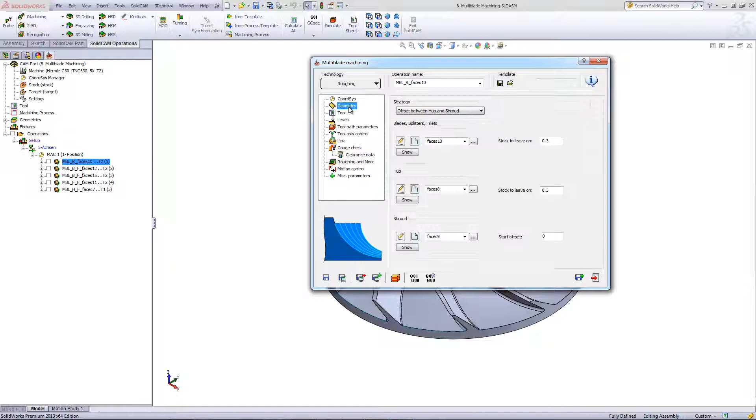When you go into geometry, you can see by touching each area exactly what you need to choose. For example, the first is asking for the blades, splitters, and fillets. And in this particular case, I chose exactly that, my blades and the fillets, including over here. If I were to go into my hub, you can see I have my hub, which is this area over here, the floor over there. And it also requires me just to choose the shroud, the shroud being the actual top of the blade as shown over here.

The option that we have on top is the strategy of offset between hub and shroud. Among others, we also have offset from hub or offset from shroud. Most often used, however, is the offset between hub and shroud. Now, let's go into our tool. In this particular case, I'll be using a tapered mill tool. The reason for using a tapered mill tool is because it's a very sturdy tool. It's used very often in parts like this, where you can have a small diameter at the bottom, but still have a strong tool up towards the top. So this is a much stronger tool to use, and we do support using tools of this type.

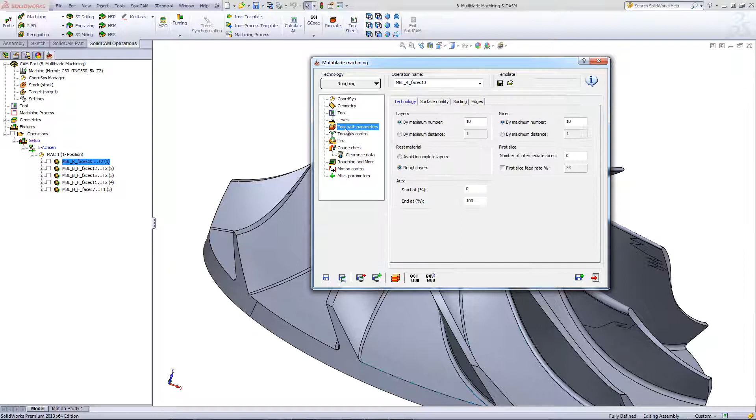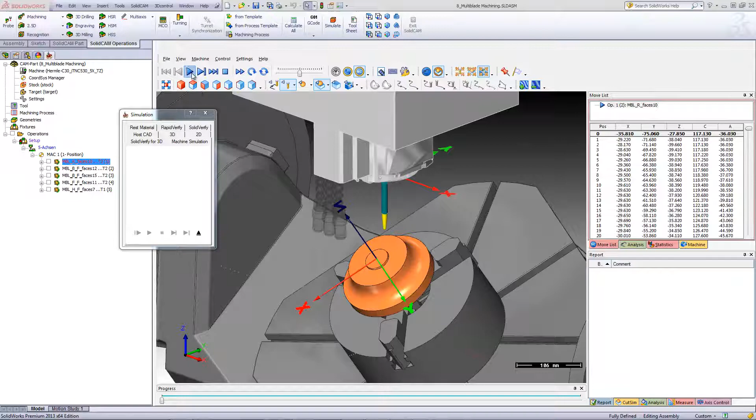Now let's go immediately to our toolpath parameters. All we have to do over here is determine the maximum number of layers as shown over here and the slices as shown over here. I do not have to do anything in the tool axis control or my links or even gouge check. Now let's take a look at the machine simulation, and you'll see that the tool is actually working exactly in that area itself. As I zoom in to the blade itself, you can see exactly how it's working.

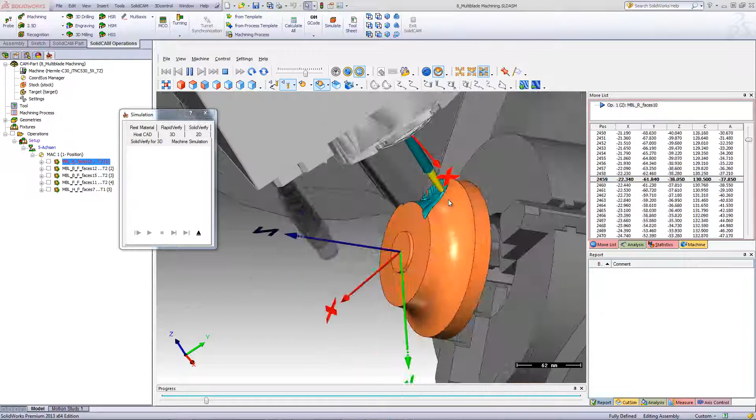And let's just go a little faster. And you can see that it's actually working exactly the way I want it, roughing it out from the top and then going down to its next step until it completely finishes the part itself. Let's stop it over here so we can see what was done up until this point. And as you can see, it's actually working around this entire area.

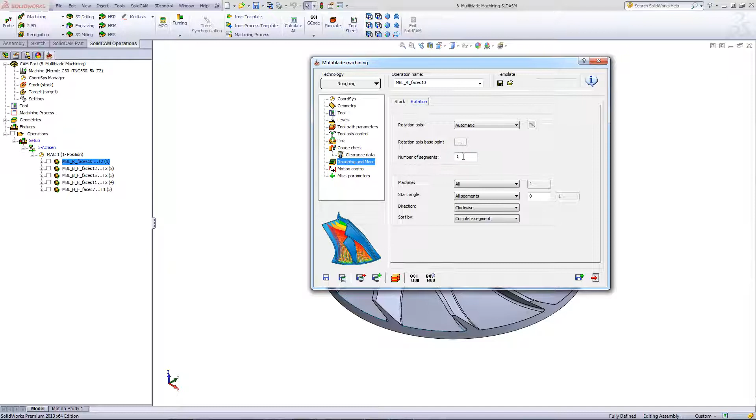Now, if I want to do this on the entire part, all I have to do is go into roughing and more and go directly to rotation. And rotation is all very simple. It's just pick the number of segments. In this particular case, I want to have all 5 segments. There are 5 segments on the part itself.

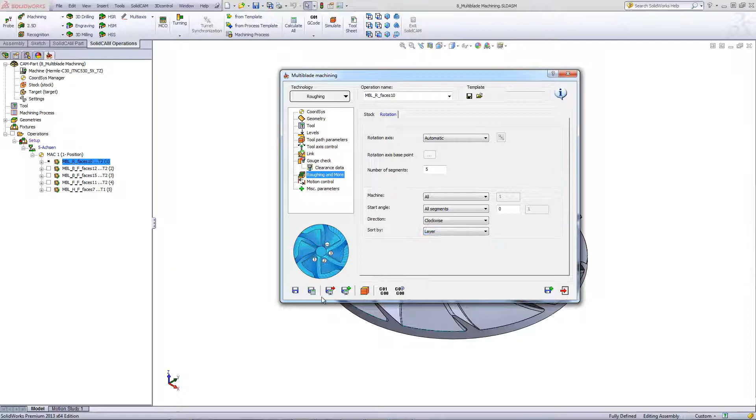And I can either machine it by determining the number of segments I want to do or do all of the segments. I can also do each segment individually or do it by layers across the part or by slices along the part itself. You can see also on the side the diagrams that are chosen every single time I change the sort option. And by the way, the diagrams also change in every single one of our fields over here. Let's change the sort by to layers, for example, then calculate and run my simulation.

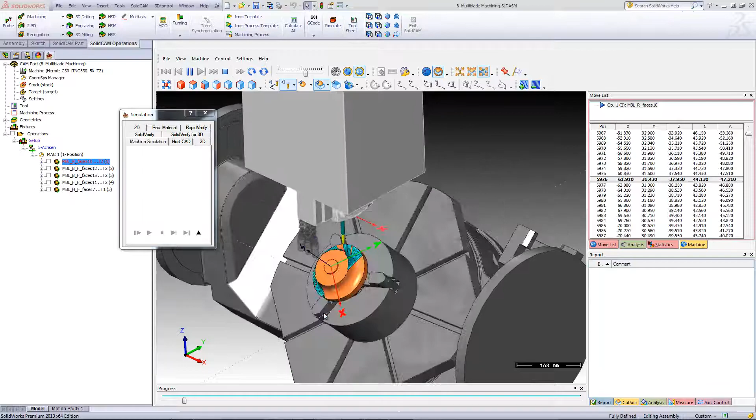You'll see that the tool will go down, work at the first level as shown over here, and then when it finishes that, before going further down into the part, it'll actually now turn and do the next segment, finishing each layer over there. Once it finishes that particular segment, then it'll go to the next one and to the next one. When it goes back to the first one, then it'll go to the next step, as I've determined that's the way I want to work on this particular part.

Let's stop the simulation for a moment, and you can actually see that each segment is being machined out around the part itself. Now, in our next operation, we've used the same option of multi-blade machining, but this time we'll be doing blade finishing, working on the blades itself, as shown over here in the diagram.

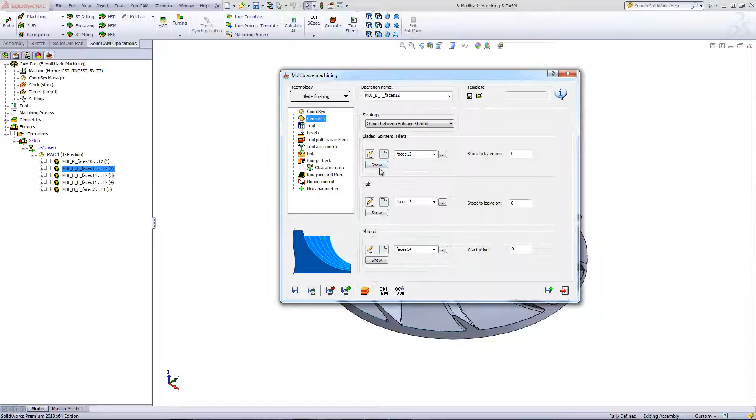The geometry, just as before, we have our blade splitters and fillets, as shown over here, working on this particular blade over there, our hub, and of course we have our shroud, which is the top surface over there.

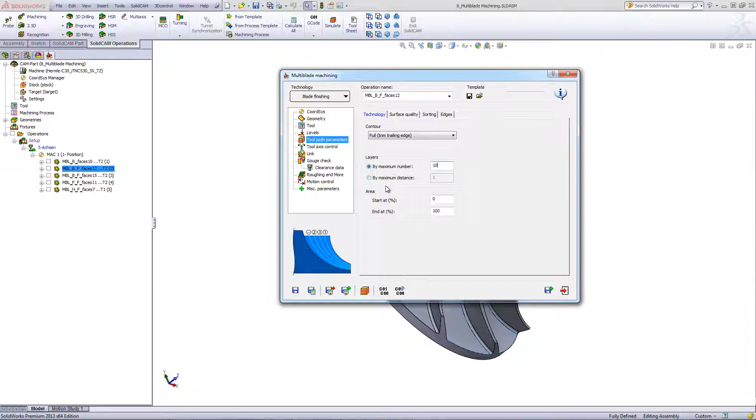The tool again will be my tapered mill, and if I go into my toolpath parameters, again we have our layers determined either by the maximum number of cuts or by a specific distance on the part itself every single time you want to go down. So you can do it either way, either by distance or by the number of step downs you want to do.

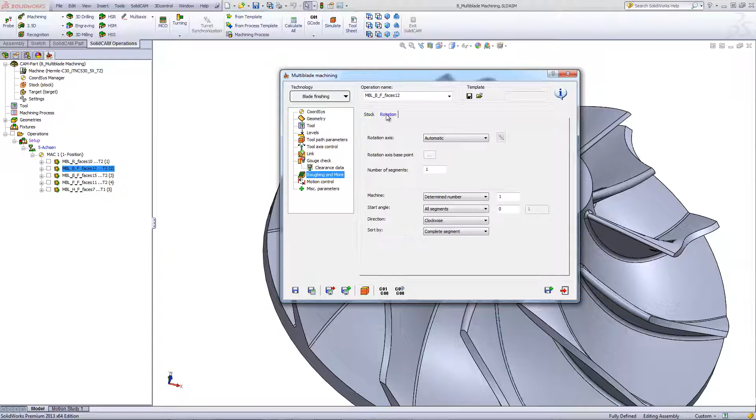Running my simulation, you see that the tool will actually go down on that one blade exactly 10 times all the way down to the bottom. And again, we also have the option of going to roughing and more, and again doing rotation according to the amount of segments, and so on and so forth. Now, our next operation is again the exact same thing, but this time, since it's a different blade, we have a different operation for that particular blade.

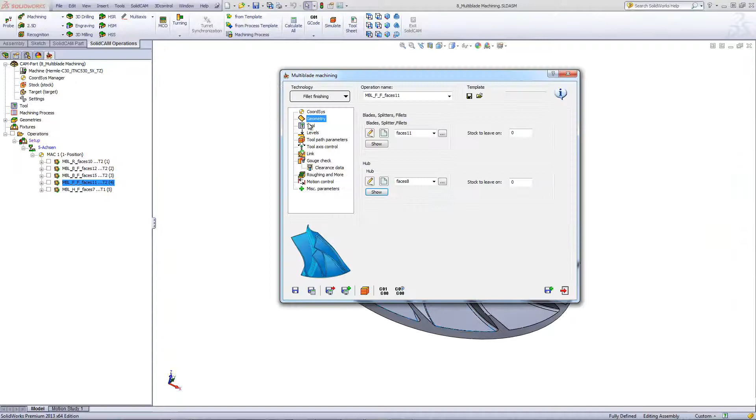Now, in our next operation, we have the option of fillet finishing. If I go into my geometry, you see we have our geometry, which includes the fillet at the very bottom. And of course, we have the hub determining the actual floor of the part itself. If I go into my tools, again, I'll be using the taper mill.

And if I go into my toolpath parameters, we have the option of choosing on the blade side where to work, either by the tool diameter, by the big tool diameter, or other options shown over here, by number of cuts, or by same as hub side. In this particular case, I'm just going to show it by the big tool diameter, which I've chosen as 8 millimeters. I can also have an overlap if needed.

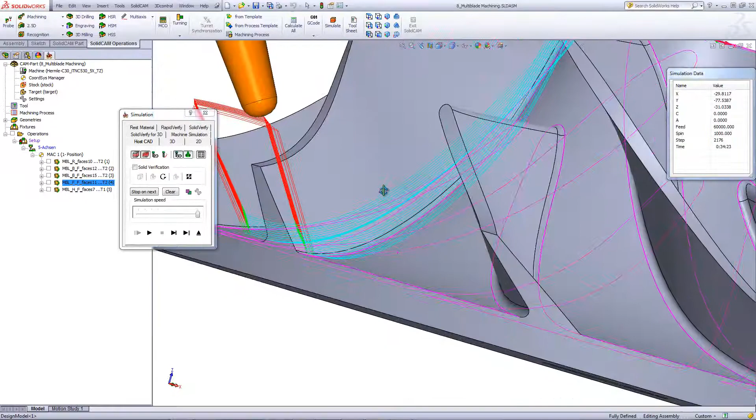And we also have the hub side, how much of a cut do I want to have on the hub side itself, which can be determined by the number of cuts, just as we had on the blade side. Same options we had over there. Let's run a simulation, and you'll see that in this particular case, it's working exactly in this area over here, just around that particular radius over there.

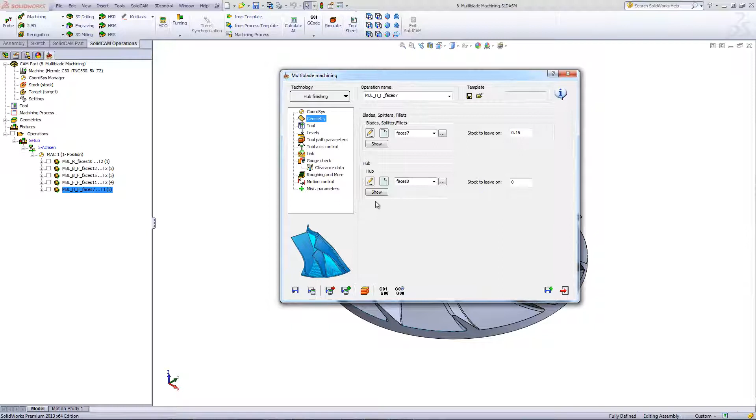Now the final operation that I have over here is for actually finishing the floor. So if I go into the operation itself, you'll see that I've used the option of hub finishing, finishing the actual floor, which is the hub. And you can see that on the diagram over here. The geometry, just as before, we have our blades and our hub separately. We have our tools. In this particular case, I use a ball end mill.

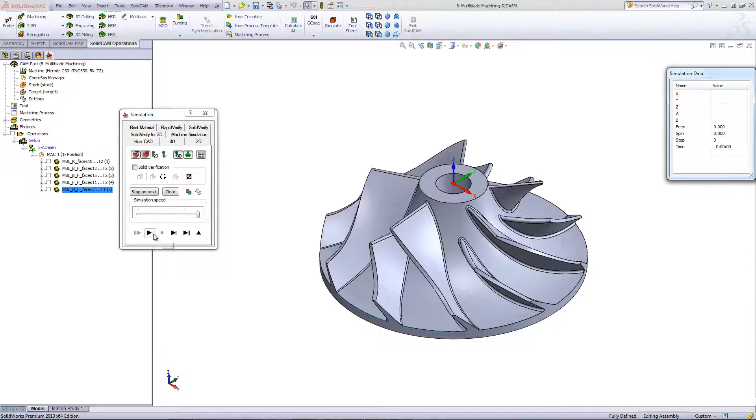And if I go into my toolpath parameters, all we have over here is just determining either the number of steps or the actual distance between each step. Taking a quick look at the simulation, you'll see that the tool will actually go in, work on each area exactly the way it's supposed to around the blade, finishing off the hub up until the very end.